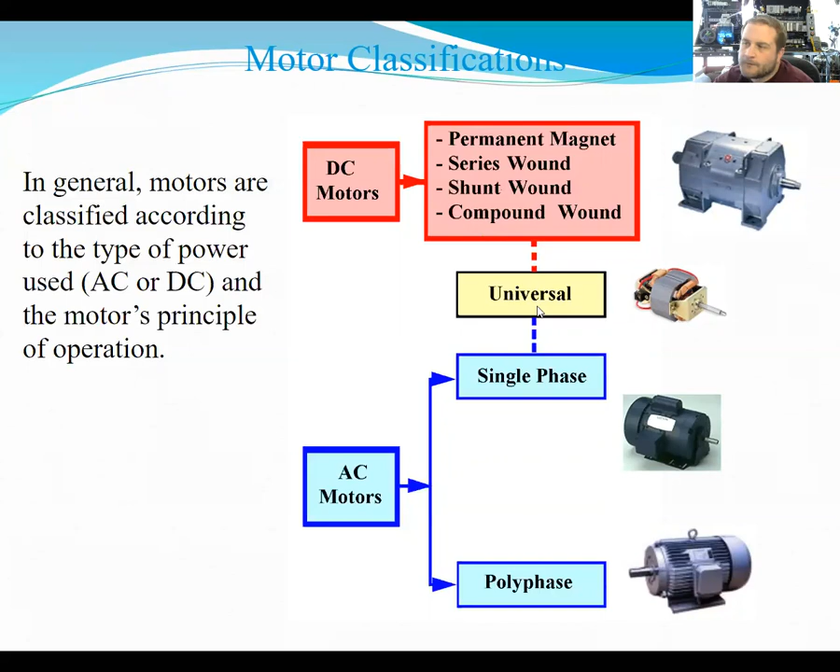So AC motors then are divided into which two groups? Induction and, oh, you got single phase and polyphase. Okay, sorry. I'm basing this on what the PowerPoint says. What were you gonna say, John? Induction motors and what other motor? I don't remember the second type because most motors are induction. Synchronous? Was it synchronous? Yeah. Oh, there it is right there. AC motors, single phase, polyphase. So single phase motors, you have induction, synchronous; polyphase, induction, synchronous, wound rotor, squirrel cage. All the same type, all the same operating principle.

What do you think the difference is between single phase and polyphase? Polyphase is going to be three phase, right? Mm-hmm. So what's the difference? The only difference then is in the way that they're made. 3 sets of windings. Right. How many sets of windings? Usually 9 sets of windings in most polyphase motors, but yeah, it's the sets of windings. How many sets of windings and then how far apart they're spaced in degrees.

Is that why when a motor is single phasing, it'll technically still work? Yeah. You're not getting the magnetism in that. If you're missing a phase, you're missing however many windings pushing that magnetic field around in a circle, right? The whole point of alternating current around 360 degrees is so you're spinning a magnetic field. Correct. Get more power.

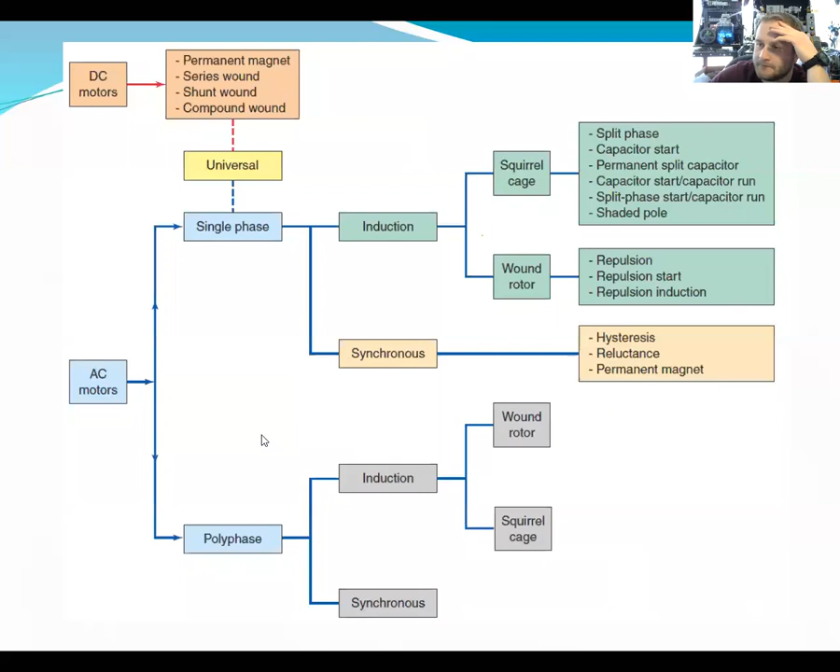Yeah, we just talked about this. Voltage applied to the stator causing a rotating magnetic field. I don't like how that's worded. It's the alternating current that's causing the rotating magnetic field, right? Right. Inducing a counter EMF, which stands for what? Electromagnetic field. Electromotive force. Yeah. Maybe it is electromotive force, but it's a fancy phrase for voltage.

Induces a counter voltage in the rotor by the flux of the magnetic fields. A rotating field is developed in the windings, and the rotor tries to follow the magnetic field in the stator. The rotor cannot spin as fast as the stator because of the load, and the motor slips some.

So how would you find that? How would you describe motor slip? Power loss. Sort of. Power loss in the, yeah, I guess you'd have some torque loss there. But slip is going to be, if you were perfectly efficient, if your rotor could spin just as fast as your stator, and could spin just as fast as a magnetic field, and you'd have zero slip, then you're going to spin at exactly the amount of RPMs that the motor is rated for.

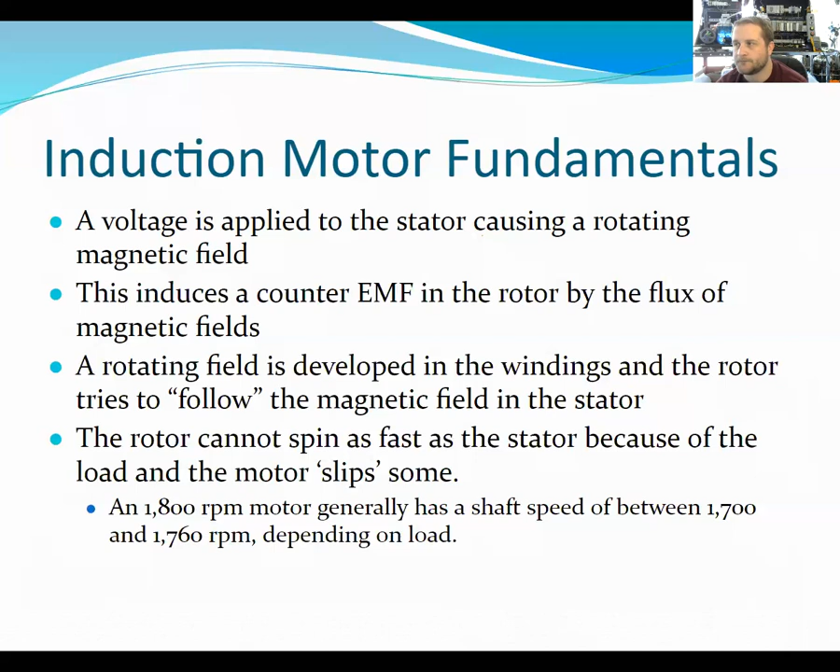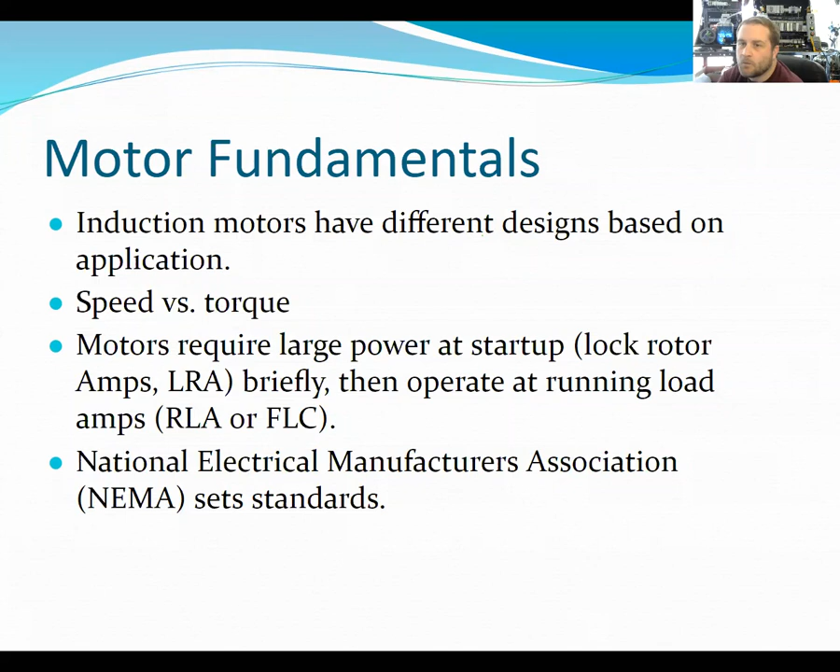How many watts in 1 horsepower? It's a number you're probably gonna use if you get a job in industry. You're gonna need to know this. And if you ever need it, it's in the Ugly's book. 1 horsepower equals how many watts? Somebody in this class ought to know this. 746. Who said that? Nathan, let's give Nathan a round of applause. I cheated. Oh. 1 horsepower is 746 watts.

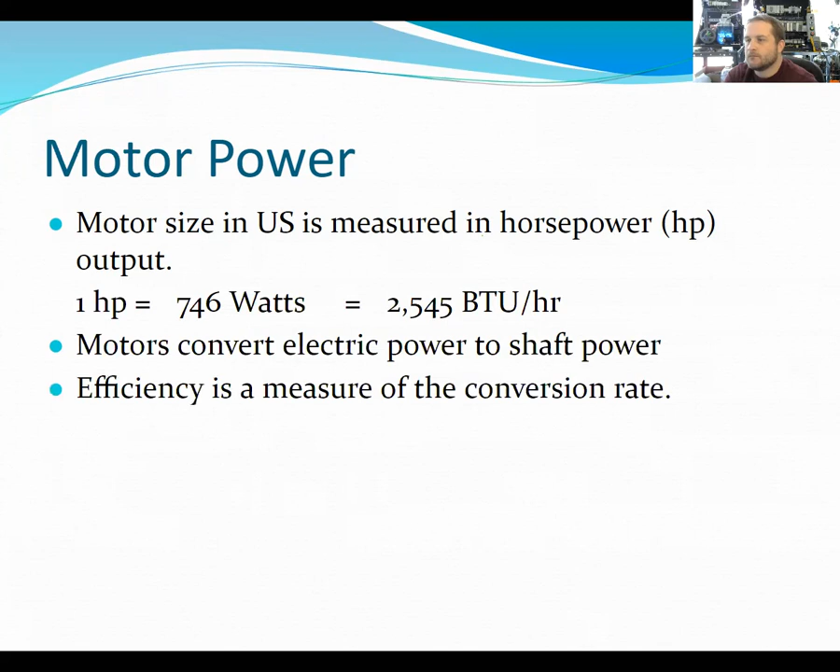And horsepower is also an amount of work done over a period of time, so the same as watts. And we'll get more into that in a minute. There we start to talk about efficiency. Energy loss is in the form of heat. Okay. 2,545 BTU. Here's where we need to start remembering some things for math. Horsepower is a measure of how fast work is being done, and it is the amount of work being done over a given amount of time. Work is force times distance. So the work it takes to perform a task is measured in terms of the force exerted to move something and the distance it is moved.

So if I said something was 50 foot-pounds, what am I describing? Work, force times distance. And that would be feet times pounds. So if I needed to lift this monster, let's say this is 2 pounds, and I need to lift it from the table 5 feet in the air. How much work is that? 10 foot-pounds. 2 pounds times 5 feet is 10 foot-pounds, correct?

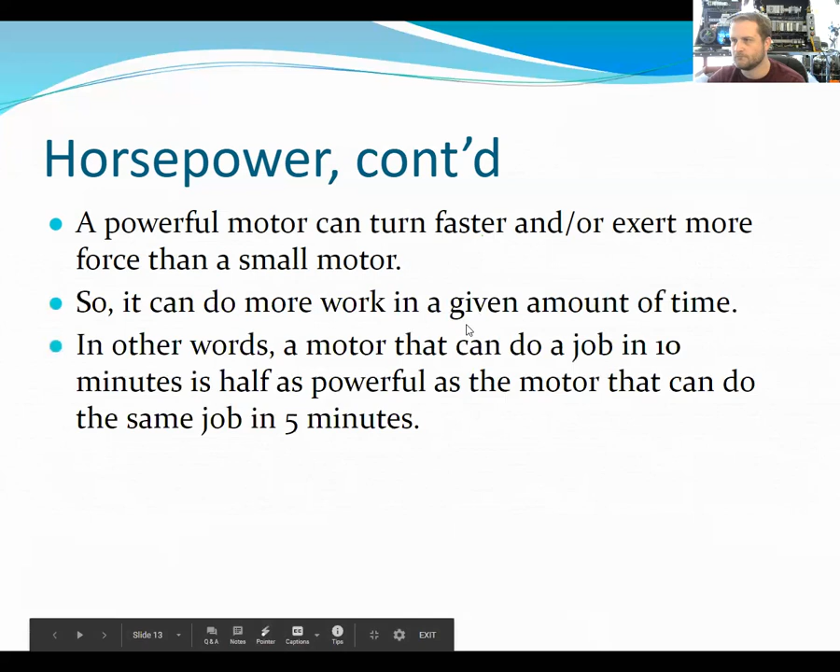Powerful motor can be... this is all common sense. So here's what I was getting at. 1 horsepower is how many watts? 746 watts. It is also defined as 33,000 foot-pounds of work in 1 minute. Remember this number. See how I did that? Circle 33,000.

That's pretty slick. Did you see that? I've seen that. Oh man, it doesn't go away. Do you even know what you're doing over there? No, I'm just playing. And you mute me when I do it.

So using the example from before, if you wanted to lift a 300-pound weight to a 5-foot platform, we're gonna lift 300 pounds of weight 5 feet in the air in 1 second. How many foot-pounds per second would that take? 1,500. Sure about that? Is it per minute? So we divide it by 60? No, because it says in 1 second, how many foot-pounds per second would you need? So wouldn't that just be 1,500? Times 60? Yeah, just be 1,500.

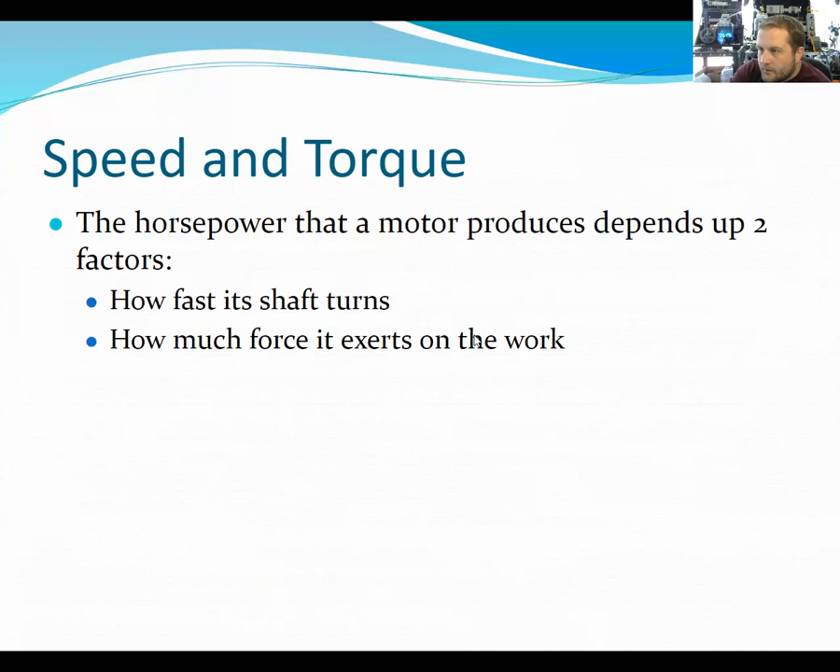Horsepower depends on the speed of the shaft and how much force it exerts on the work. Why would that part matter? Or how would you affect that? With the load? The speed of the shaft is going to be dependent on basically the distance of the magnetic field away from the shaft and how many times per second we're spinning, so 60 times per second. And how much force it exerts on the work. Bigger the windings, bigger the motor, is going to create a stronger magnetic field, correct?

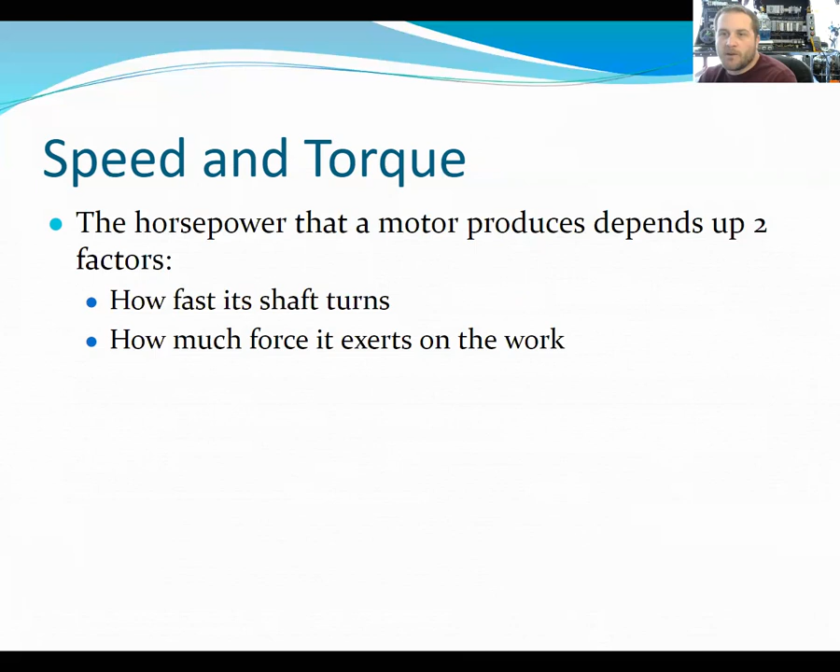Hey, kids. Shh. Yes. Okay.

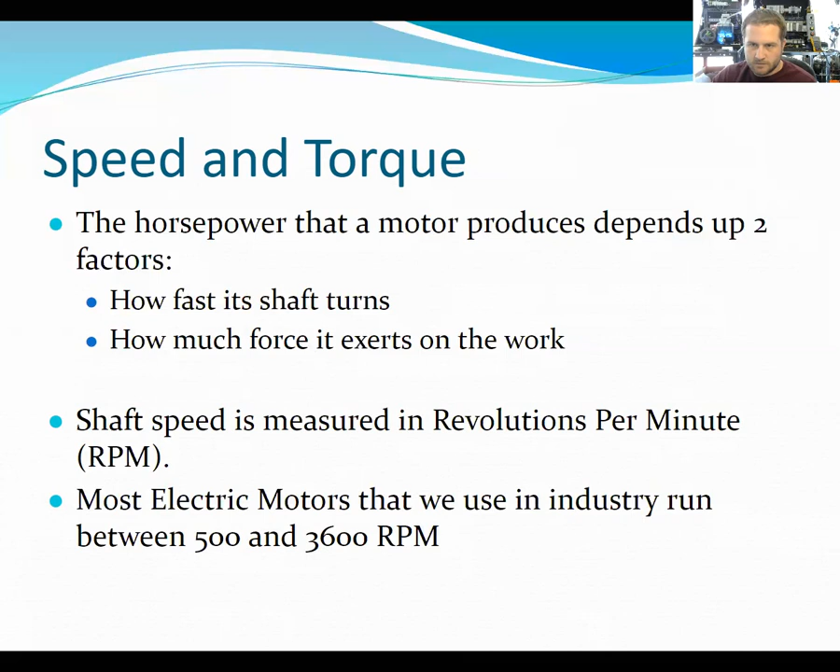Shaft speed measured in revolutions per minute. Most electric motors between 500 and 3,600 RPMs. So if we're using a motor to not do rotational work like a drill, but if we're using it on like a conveyor or a winch, you're pulling things in a straight line, which creates some math, right? You're using a round motor shaft to move something in a straight line. How could you affect the speed of that movement?

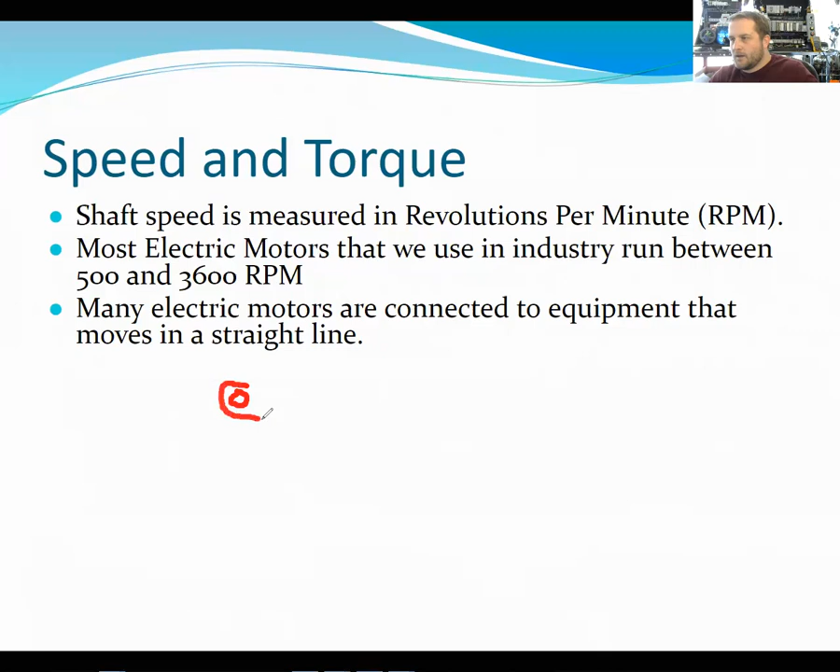Getting a bigger motor. Not necessarily a bigger motor, yeah. Bigger windings. Rotations per minute. Yes. What else? Your ratio. So if I have a motor shaft moving a, let's say it's like a belt, conveyor belt, and I want to use the same motor to move it quicker. Higher voltage. If I put a pulley or extended the size of the shaft, would that at the same speed make the belt move quicker? Yes, because it'd be more revolutions.

It'd be the same amount of revolutions, but a bigger circumference, right? Isn't it the bigger the pulley, the slower it goes? Or is it the opposite? Think of it this way. Same motor, same speed, in one revolution, you're going to move the distance of the circumference. The radius of this is 1 inch, and the radius of this is 3 inches. What would the circumference be?

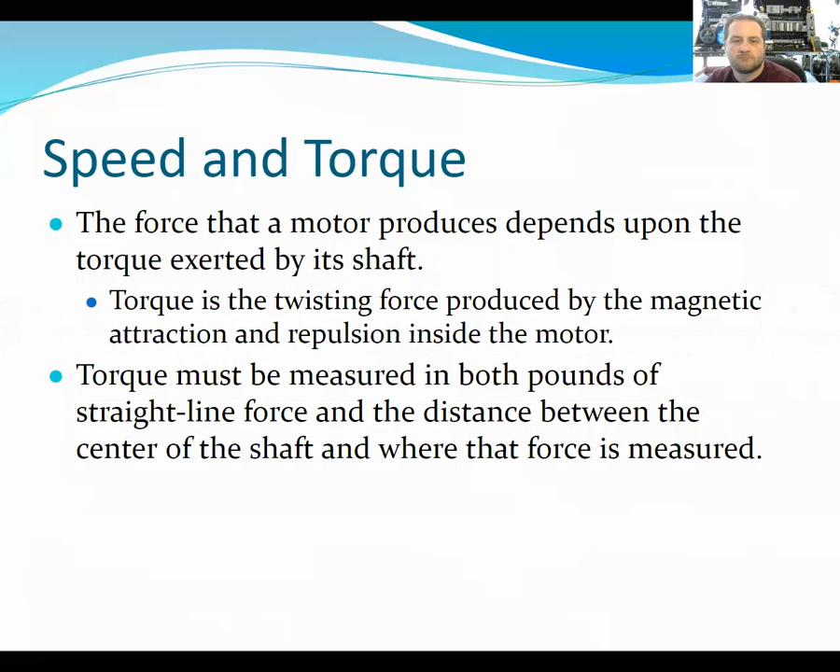So distance away from the shaft. If I need to move the same amount of weight with a motor, and the weight is further away from the shaft, does that motor need to create more torque or less torque? Less. It needs to create more torque. The further away from the shaft you get, the more torque you need, right? My bad. Oh, you're saying it needs more, not creates more. Right. Because remember, it's only doing the work at the location of the shaft.

So if this is my shaft, it's going to do the same amount of work in this area, but think of it this way: if this is 10 pounds, lifting it up closer to my body is a lot easier than holding it all the way out here and lifting it up, right? It's leverage. Like a crowbar. Yeah, exactly. So I need more torque or rotational force to lift it further away from my body.

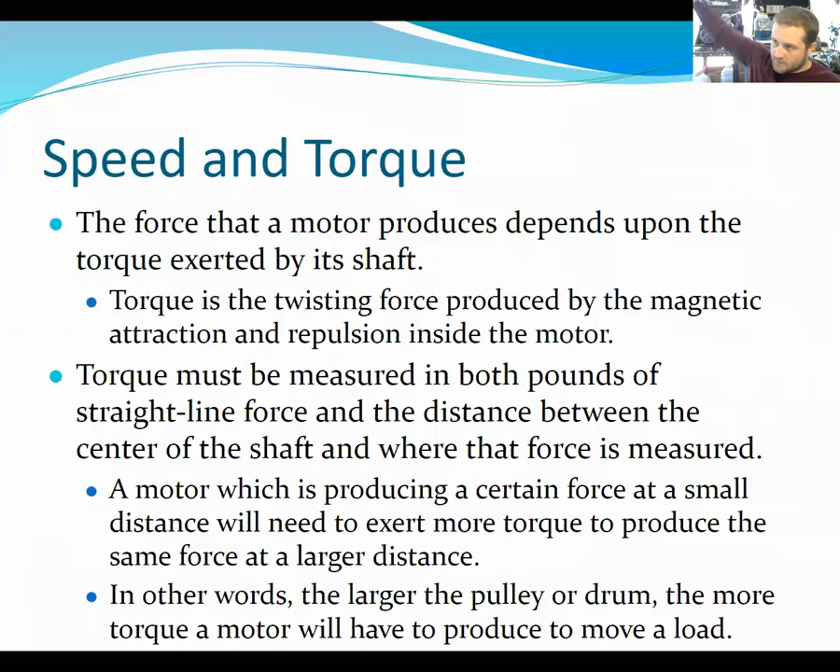So a motor lifting a 10-pound weight a distance of a foot away from the shaft is exerting 10 pound-feet of torque. If you double the size of the pulley, the motor must exert 20 pound-feet of torque. What do you think that does to the current in the motor? Increases it. Increase. Yeah. So what do you think happens to the heat in the motor? Increase. Increases. I would say the heat is on. The heat.

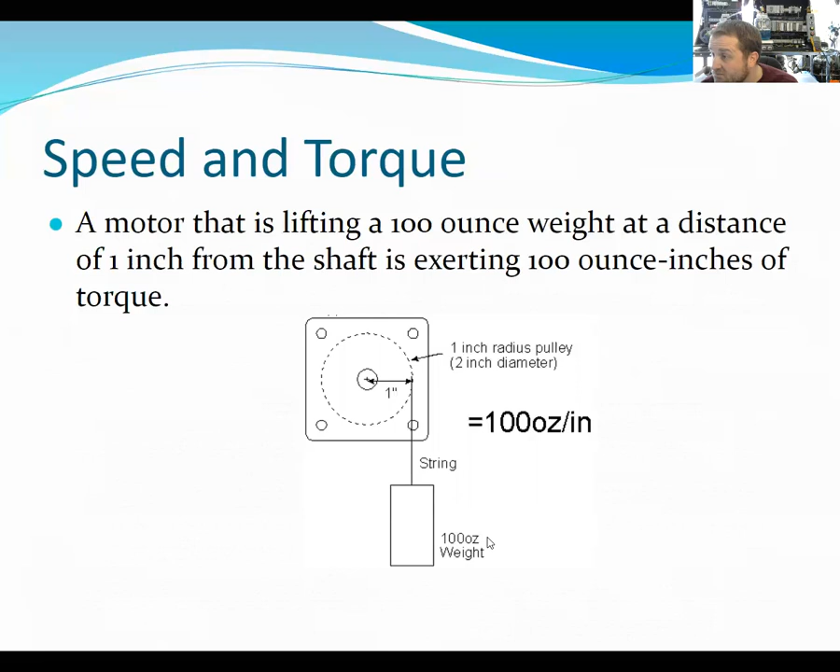And here's another example. 1 inch radius pulley, so 2 inches in diameter. 100 ounces per inch. We talked about this already. Larger motors produce more torque because of greater distance between the shaft and the repelling and attracting magnetic poles.

Something there for Dirty Cody, whoever that is.

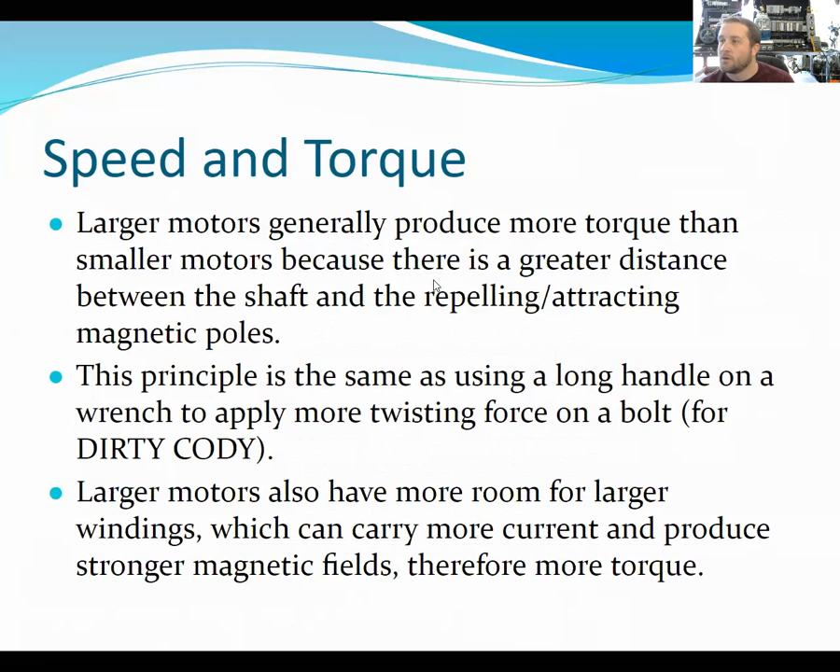Larger motors have larger windings, carry more current, produce stronger magnetic fields, and more torque. How much torque in pound-feet would it take to break 20-pound fishing line if the reel was 2 inches in diameter?

So you've got a reel, and you've got fishing line, and to break it, 20 pounds. So if we had a 20-pound fish on this line... Would it be 3.2? Close. Well, the way I worked it, I did 20 times 1/6, right? Wouldn't that work? Why the 1/6? Because it'd be 2 divided by 12. Would it not?

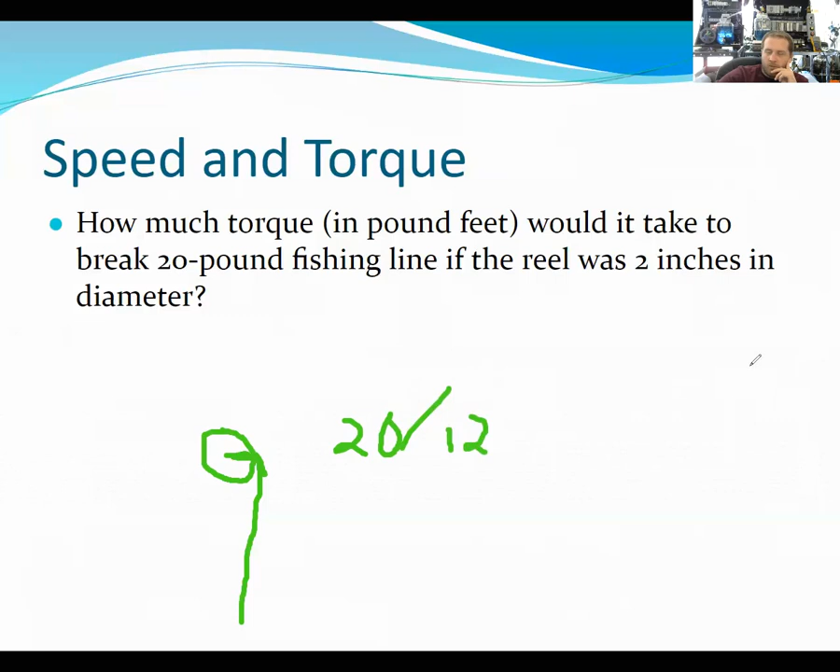So we're an inch away from the middle. How many feet is that? 1/12. 1/12. So we're looking for pound-feet. So it'd be 20 pounds divided by 12, or 20 over 12. Let me look it up. It's 1.67. Wait. Okay, that's weird.

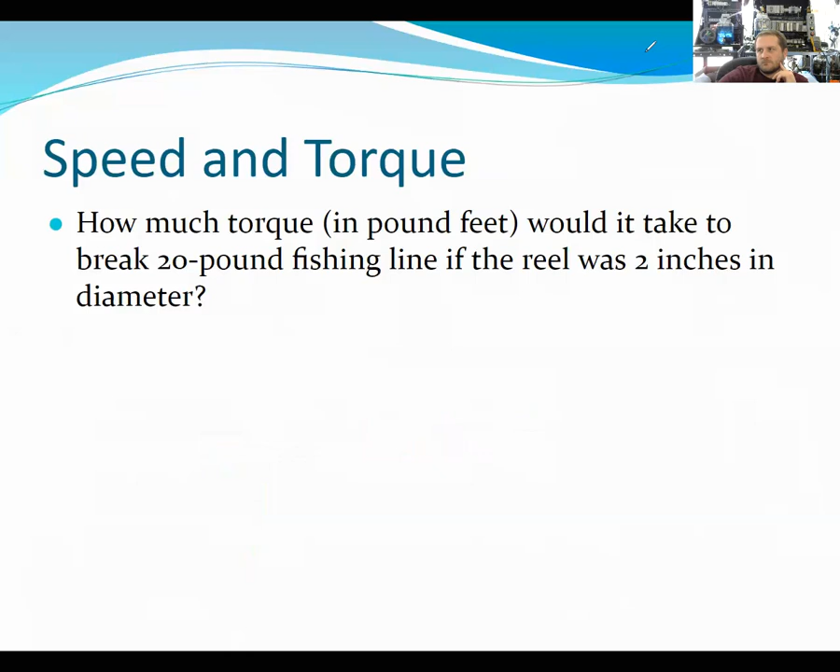The reel had a direct drive crank handle 4 inches long. How many pounds of force would have to be exerted on it to break the 20-pound line? So would it be the answer I just gave, the 3.2? Because this time it'd be 2 divided by 12 gives you 0.166 times 20, so 3.33. Four divided by 12, times 20. Or 20 divided by 4 divided by 12.

Well, because if that's the diameter, we want the radius, which would be 2, and then it'd be 2 divided by 12, right? You're right, but that's for torque. I don't like this question because it's changing from torque to how many pounds of force. So here you're saying how many pounds of force would you have to push on that? Right, they didn't change the size of the wheel, guys. They added a 4-inch handle. So now you've got this 4-inch handle. So what is the force you need to apply here in order to break the 20-pound line?

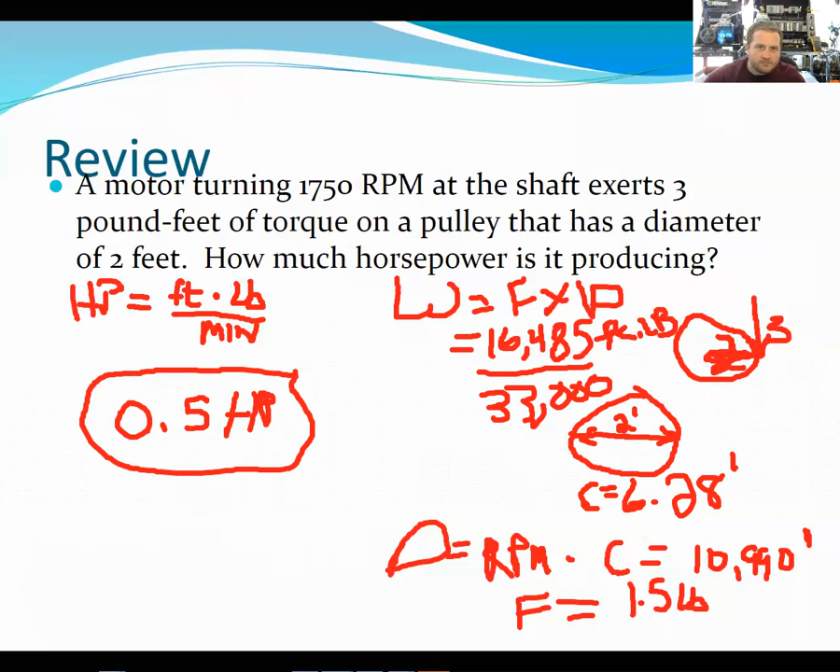Yeah, half horse. Actually, I'm pretty sure horses are like 2 horsepower, which is weird to me. I assume one breed is bigger than the other. It's like saying a German Shepherd and Chihuahua exert the same amount of force. Most horses are capable of 14.9 horsepower. Did you just Google it? No, Johnny got that right off the top of his head. Well, it's Oklahoma, so you never know what's floating around up there.

All right. We'll call it quits with that slide today. And next week we'll get into some more examples. We'll talk about efficiency and heat, and see if we can't get through this thing next week. I doubt we will, but maybe we will. We're about halfway there.